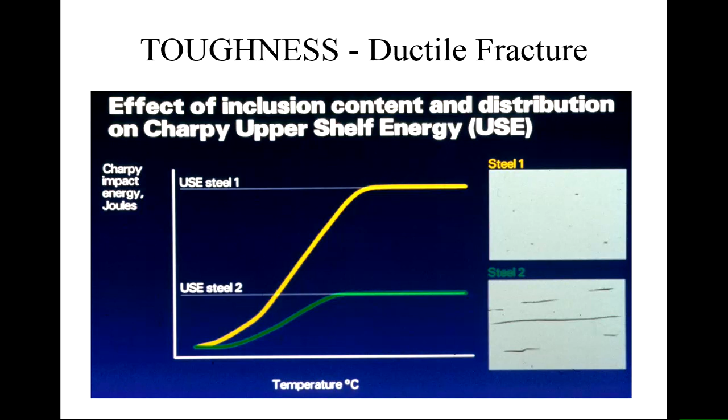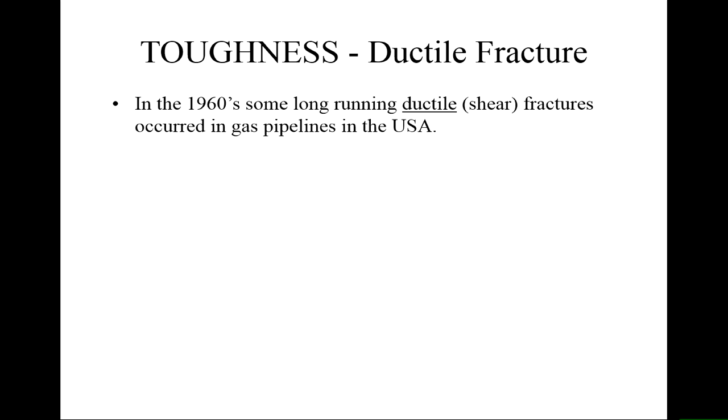So why is this important? Well, we got some highly ductile failures in the US in the 1960s, and we use the words 'long running' - not because they lasted a long time, but because one defect crack produced a crack that unzipped a pipeline for a kilometre or more. So one defect, and then the pipe responds by propagating that crack, and effectively you destroy a large proportion of the pipe. This was really related to the quality of the metal that was being produced.

So the stored strain energy in the pipe was sufficient because it had a low shear fracture energy, because the shelf in that ductile brittle transition was at a low level. And as I say, it's related to impurities, to sulfur and things that were in the steel.

These steels were called dirty steels. They were pretty clean actually by old standards, but they had a lot more of these inclusions in them than conventional pipeline steels. So if you buy steel from a supplier that meets the specification, you've got to be careful that the specification covers things like these inclusions. That's why we tend to put a fracture toughness number in the specification as well as a strength, because the inclusions are so small in volume fraction that they make little or no difference to the basic static mechanical strength of the system. But for fracture, they make a huge difference.

So, of course, you need a convenient test to make sure that your material will pass this, and the Charpy V-notch test, or the Charpy test, which can easily be correlated with full-scale fracture propagation tests on pipes, has been used as a way to say we need this amount of Charpy energy from this simple test.

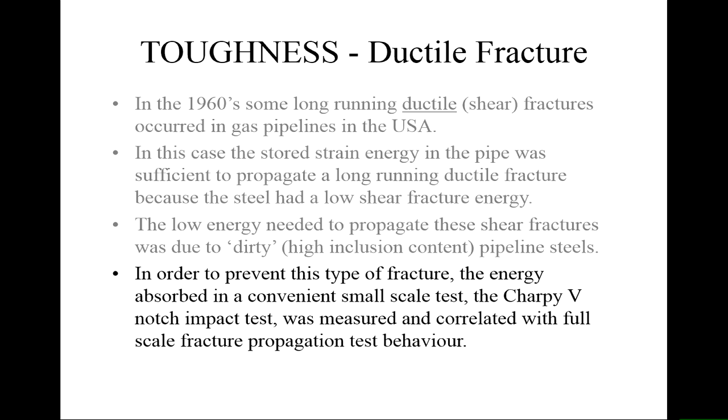A Charpy test takes about 10 seconds to do. The making of the sample takes a bit longer, but it's a very easy test, and because it's easy, it's quite reliable to use for development processes and quality monitoring.

The Charpy test that is used is a standard size test piece. You can also use half size or third size test pieces depending on the wall thickness of the pipe. This has to be cut out of the wall thickness with the notch aligned in the longitudinal direction so that you can get the effect of the hoop stresses.

It's a 10 millimeter square bar, 55 millimeters long, with a 2 millimeter deep V notch cut into it. You can buy from most suppliers special cutters designed to produce the geometry of the notch that you need, so standard workshop equipment can be used to make these samples.

In the Charpy test, there's a support which is 40 millimetres apart, and a swinging pendulum comes and hits the back of the sample to provide the energy. What normally happens is you lift it up to a certain height, there's a certain stored potential energy, you swing it down with no sample in the way, and you see how far it goes up — that's the losses just from the bearings in the machine, and you can set that.

Then when you put the sample in the way and it breaks, some of that potential energy is absorbed in breaking the sample, so it doesn't swing up quite so high. By seeing how far it swings, you can work out how much energy has been absorbed by the sample. It's a very, very simple test.

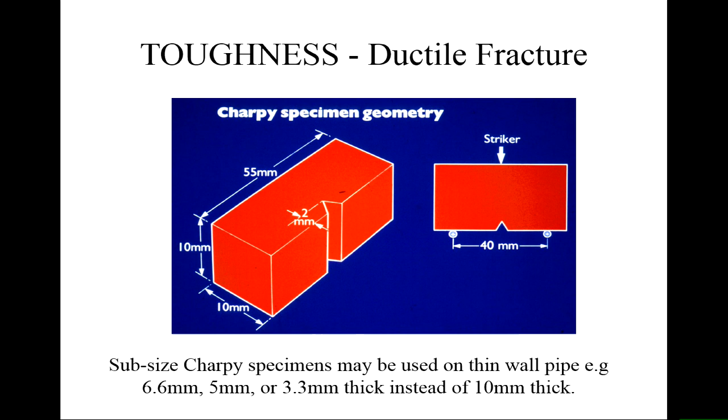So it looks a bit like this. You have a hammer, and that hammer's got a funny shape because you have to make sure it captures the sample and doesn't bounce the sample out of the holder. The sample sits here on the anvil. This comes down and it swings through, and you can see at the end of the swing it's not gone up to the original height, so it's absorbed some energy.

What you're trying to do is that sort of bending test. It's a high-speed bending test with a notch on the tensile side.

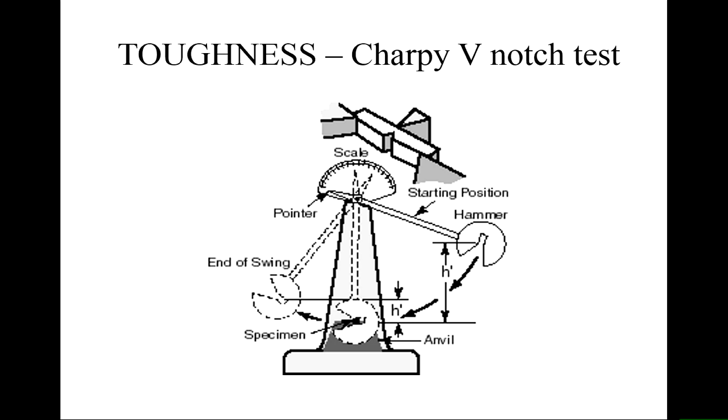Where possible, you take the Charpy specimen in a circumferential direction so that the notch and the fracture propagates in the longitudinal direction for the pipe, because that's what happens in real life. You can't always do that — if the pipe is too thin-walled, then you may not be able to, since the thickness of that sample is less than the full pipe wall thickness.

That means that if there are problems with defects and non-uniform composition across the wall thickness of your pipe, which there often are, the surfaces are different from the bulk, then you'll have to do some experiments to correlate a full-scale pipe test with a Charpy test.

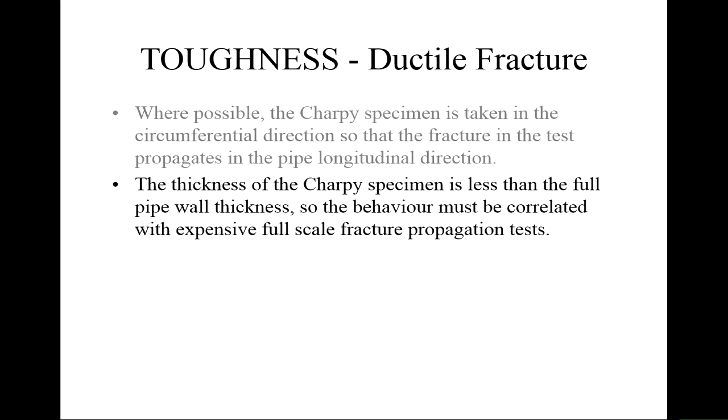Many of the companies have done those correlations, and they'll have a simple equation that relates Charpy to the real life performance. Those performance tests are very expensive, so you want to make sure that you do as little of those as you can to prove that the Charpy test is going to be right for you.

After doing that, recommended Charpy levels have been tabulated in the pipe standards. So we've got a strength criteria, and we've also got a toughness criteria that the material has to meet. Now, of course, these are all things that you can do with any composition of steel you like. So the standard specification does not fix the composition of the steel, it just fixes the properties that you need.

So you have to be careful when you look at specifications that they are performance specifications, and therefore if you pick up steel from one manufacturer and steel from another manufacturer, they aren't necessarily the same. And steel from one manufacturer one year might not be the same as steel from the same manufacturer to the same specification another year. That's not such a problem when dealing with easily quantifiable tests like strength and toughness tests, but if you're going to weld those materials, sometimes the welding procedures will change because the steels are no longer identical, and you have to do some qualification tests.

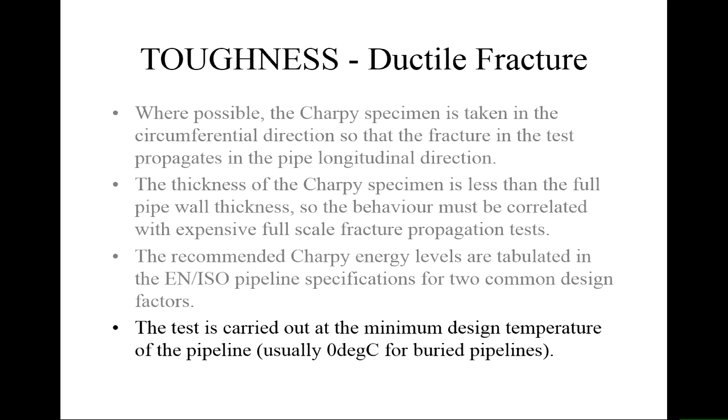So we have again a lower shelf energy and an upper shelf energy associated with the transition from brittle behaviour at low temperature to ductile behaviour at high temperature. So rather, in a Charpy test, rather than looking at the surface and just saying there's 20% brittle and 80% ductile, you now have an energy from that system, and that energy can be plotted directly on a curve, so there's a number that you can compare. It's a little bit less subjective, therefore, than the drop weight tear test.

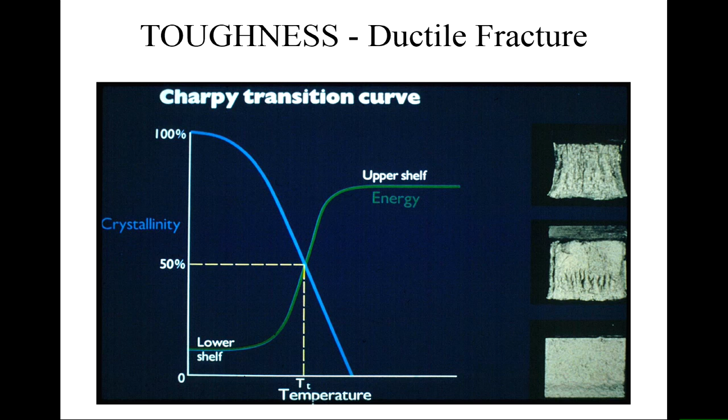Transition temperature, 50% crystallinity, halfway between the lower shelf and the upper shelf, so half ductile, half brittle. So when we talk about a ductile brittle transition temperature, we're going from something which is predominantly ductile to predominantly brittle. It doesn't mean to say there will be no ductile behaviour below that temperature, just that it's 50-50.

So you go and look at the standards. This is the EN standard, and you've got a minimum impact energy in joules for outside diameters of the pipe less than 1.43 meters, and wall thickness less than 25 millimeters. So you start to see that you get different tables with slightly different conditions. You'll see the values for full-size test pieces.

And you've got two things here. You've got the average value to start off with, and in brackets you've got the minimum value. And what you can see is as we go to the higher strength steels, as we go down the steel grades here, so that 555 is the X80 equivalent across here, you can see that the average value minus the minimum value is probably about 10-15 units or something like that. It's smaller at the other end. However, it's a bigger proportion of the total energy at the ductile end. So you've got this awkward position that you've got.

So what you see here is a range of values that you can use in design, and then of course you've got to take into consideration that these things are going to be welded. Requirement 2 here says weld seam requirements, similar to the requirements you get for a low strength steel. You hope that the weld is more ductile than the higher strength steels in these particular cases.

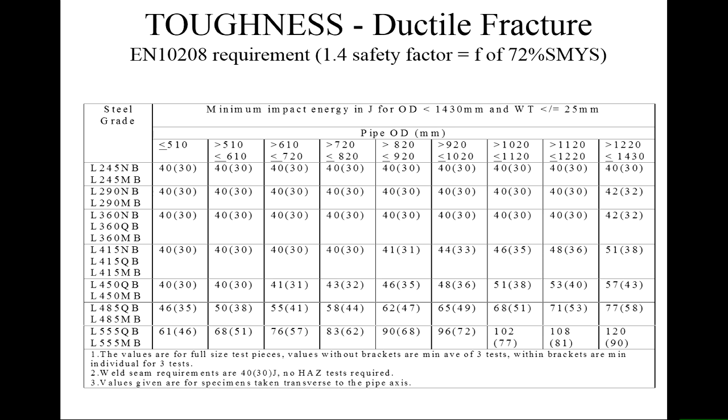Of course, you have to do full-scale testing, and you can't avoid full-scale testing to qualify new materials and to make sure that the toughness is correct.

So this is a test where sections of pipe are being welded together in a trench in a place called Spadeadam, not too far from here. It's out along Hadrian's Wall towards Carlisle, and you'll pass the signs to it on the way. Spadeadam is a military base, and often these tests happen in military bases because you blow things up.

So you have a section of pipe here, and end caps can be welded on, a trench can be made. You can match the sort of conditions that you've got for the real case. You can put a defect in, apply the stress, and watch the explosion when this happens. Then you can go and look at the pipe and see if it did what you thought. You can measure crack propagation, and measure the damage caused.

by deliberate explosions in a controlled case in a field in the middle of nowhere where you're not going to hurt anybody.

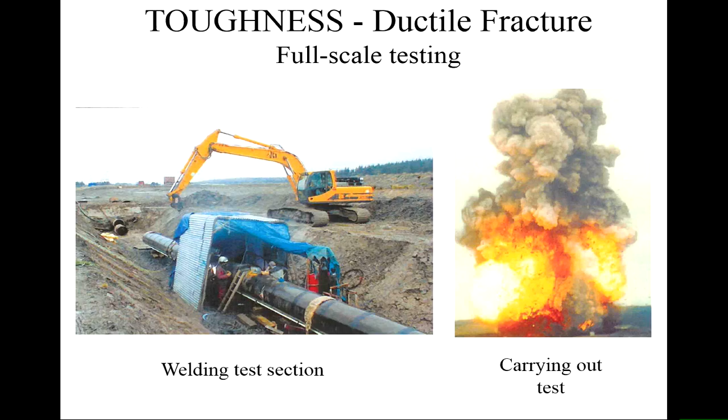So, for seam welded pipe, weld metal toughness is controlled by means of a Charpy test.

Now, of course, the weld, as if you didn't already know, we'll talk about later, consists of the weld metal that's deposited, and that's the thing that tends to be tested with Charpy. But either side of the weld, the steel has gone through a heat cycle which changes its microstructure, and these are called heat-affected zones.

The heat-affected zone, or HAZ, isn't usually measured because it changes depending on where you are in the pipe and the conditions you've got. It's usually assumed that if the welding procedure is good, the heat-affected zone isn't going to be a disaster if its properties change.

But just to make sure that's not going to be a problem, when you've got a segment of pipe being welded in the field, it might have a longitudinal weld along the pipe. You make sure that weld is staggered - it doesn't match up to the weld on the next piece of pipe.

So if a crack starts in the weld or starts in the heat-affected zone, it will run along through that one section of pipe until it gets to the next pipe, which is at a different orientation, and then it will try to crack the pipe base metal itself.

So then, you hope, you expect that you have got a failure which will only occur in one or two pipe segments and will not run on and on and on. So don't line all your welds up.

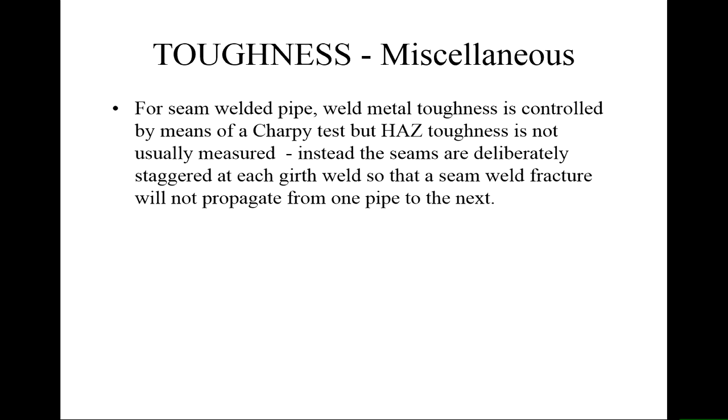Pipeline fittings, so bends, T-pieces, that sort of thing, generally have a greater wall thickness than line pipe. And they're fewer in number, and they're generally something that you can look at in a little bit more detail in the factory beforehand, so you can look for defects, do non-destructive testing and things like that.

So a simple Charpy test is sometimes specified on the material just to make sure that the crack initiation doesn't take place within that volume. You specify just a Charpy test for initiation, you don't worry too much about crack propagation. In fact, some people assume that a fitting with a heavier wall thickness will stop the crack propagation because the stresses will drop in that anyway. So they're almost put in as crack arresters every now and again.

The Charpy test, though, is there because of material quality, and we want to make sure the sulfur contents are reasonable and things like that.

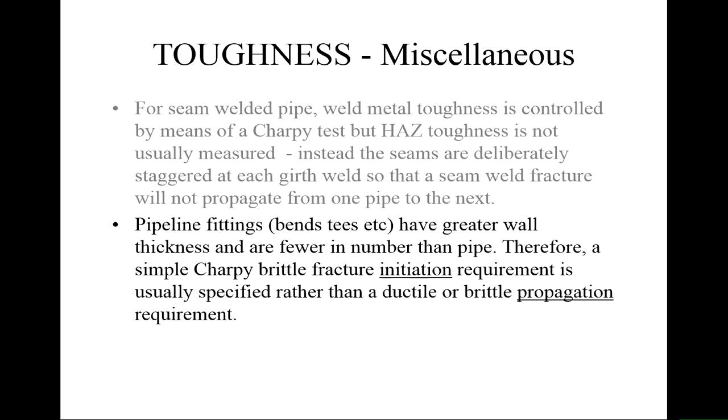A long-running fracture in a subsea pipeline is very unlikely to happen because the hydrostatic pressure from around is actually acting to close up the cracks. Therefore we don't tend to worry so much about toughness for the subsea pipe materials, which seems a bit strange, but actually that's one case where the external conditions are working in our favour.

So again, you want to check on the basic material properties, use a Charpy test, but we don't tend to specify drop weight tear tests and things like that because that's not an issue that has come up.

Is that depth specific, or is it? I have not seen anybody talking about this when the depth is more than about 100 metres, but yes, I think there is. If you're in the splash zone and at shallow depths, then there are all sorts of other questions, and I'm sure the specifications are much more complicated in that case. But for the basic pipe material on the seabed, generally not an issue.

Again, we do the Charpy test for material quality, and that should cover everything. That's the idea, I think.

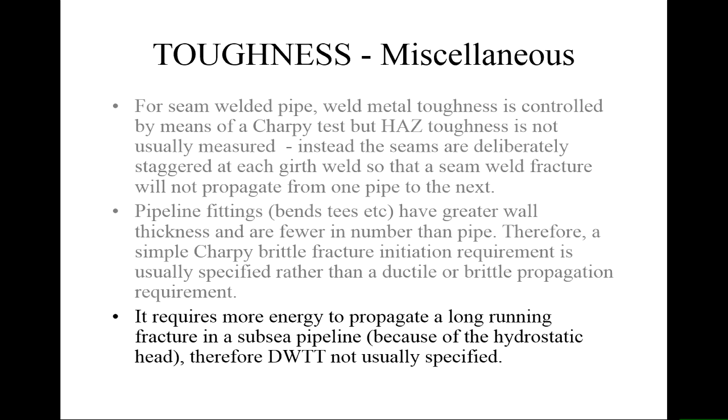Okay, so how can we reduce the possibilities of fracture? Well, if the pipeline is operating at less than 30% of specified minimum yield stress, then the chances of getting a brittle fracture are virtually zero. So one way to actually deal with these toughness issues, if you suspect them, is just to downrate the pressure in the pipe. And that is often the case for assets that have been around for some time.

There's a level where you do the NDT and things like that, and then you keep these things running at a low pressure just to get as much out of them as you can and use them as backup systems, secondary pipelines and things like that, because there's no real risk of brittle fracture. Now that's for older pipe assets.

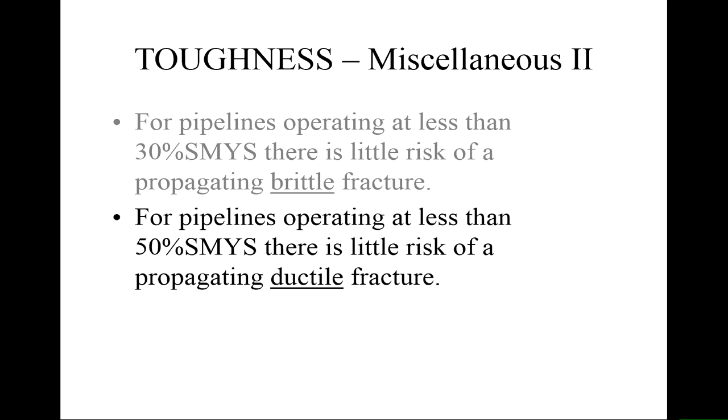Obviously, if you've replaced it with a newer pipe asset, there's less risk of brittle fracture anyway, and it's probably not something you're going to worry about too much. At 50% SMYS, the ductile fractures probably won't operate. So down-rating is a way to deal with some of these fracture issues if you're worried about them. And that's when non-destructive evaluation comes in, which we'll talk about later in the course.

So as I say, if there's a fracture problem with an old pipe, if there's a potential for a crack or a section that's been cracked and repaired, and you're worried about the whole asset, then you might just downrate the whole thing.

And that effectively reduces the design factor in the calculations, which means the asset can run on for a long time. There are some ancient pipes running that have been in service for 40, 50, 60 years, operating at something like 10 to 15% of their original design capacity. But they're still there because, for instance, they provide supplies to hard-to-get-at parts where the replacement cost is very expensive, and they can be used because the demand for gas for that particular location is relatively low.

So you need to be careful, because you can find that there are some very old and not very good materials in service, and you can't switch up the pressure just to deal with excess supply. So sometimes in this country we'll get new towns, new factories, new gas-fired power stations built, and then people have to look at the assets they've got for supply to those areas and make sure that the pressures are possible for all of the assets.

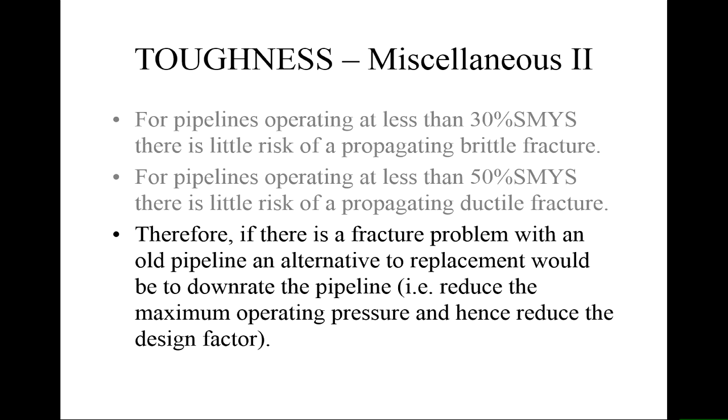Okay, let's move on to welding. Pipe is a simple geometry. It's a tube, circular cross section. We don't have any funny square pipes in this country. Stick the two pipes end to end and weld them. It's easy, isn't it? Probably the easiest type of welding, apart from putting two things together that are much smaller than a pipe. Well, in principle, yes, but in practice, no.

So weldability, the ability of someone to make a decent weld, a good quality weld that does what it says, is much more difficult. I'm no welder. I know how to switch on a welding torch. I know how to make a joint. I can do a pipe weld. Anything I do would not pass in the field whatsoever because I am not that good.

I might be able to teach you about welding in a laboratory class, but not about how to be a welder. Part of the reason for that is I learned to weld on a desk or bench in a workshop with ideal conditions around. It was warm, it was well ventilated, we had the right extract and everything there, and I had a small thing in front of me to weld and the torch to hand, nice umbilical to the MIG welding system. Very easy to do.

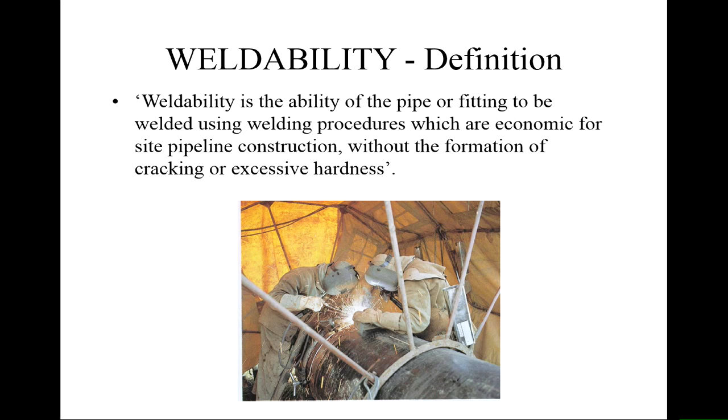So we can do something about that, and one of the things we can do is see what happens when you do the welds on site. Here's an example of manual metal arc welding with cellulose coated electrodes. You can see the weld pass there, a capping pass there, a root bead here, so this is a multiple pass weld.

In fact there are several passes in the fill here, and we've got some penetration issues. We've got a penetration bead - look at this part of the steel and this part of the steel, they don't match up, so there's an alignment issue, and we've got a change in cross section which leads to stress concentration. We've welded with cellulosic electrodes which have not been dried, and hydrogen is produced, making the steel brittle - hydrogen embrittlement. So this crack comes straight through from the hydrogen dissolving in the weld pool and then embrittling it as it freezes.

So when we're talking about weldability, we have to take these sorts of things into consideration. These are cracks, in this case, that have come because of the welding process we've done. They were not an intrinsic property of the steel to start off with. The hydrogen has come from the dampness in the air, and that has caused the problems.

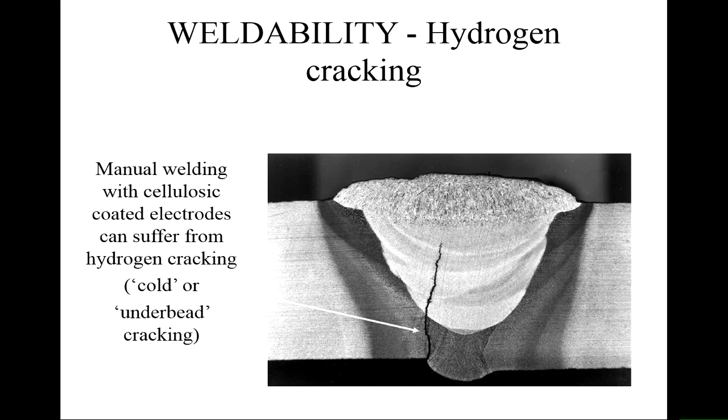So hydrogen cracking is probably the biggest problem with field welding. It tends to occur in the heat-affected zones - as you can see here, the light blue areas are the heat-affected zones. The crack might start at the weld metal, but it tends to start at the toe of the weld. So this is the fillet weld at the toe, right at the edge, and the crack you can see running in there, running underneath.

And there's another one here where there's a change in cross-section, so there's stress concentration. The toe of the weld has more defects in it than the bulk of the weld, and that's why it tends to be a starting point. In a butt weld, again near the penetration bead, this is a case where we've got lack of penetration on one side, so again you can get the crack coming in there.

For hydrogen cracking to occur, we need a source of hydrogen, and that's often water. We need a susceptible microstructure - some of the martensite structures I talked about earlier are more susceptible than the basic ferritic steel structure. And we need tensile stress, either residual stress or applied stress.

Now if you consider this butt weld, if you clamped either end of the steel and welded it so it's all flat, what's happening to the weld metal? It's deposited at a very high temperature, then cools down to room temperature. The steel contracts because its thermal expansion is being driven in the opposite direction. If you clamp the material at either side and allow it to contract, you're putting the weld metal and the heat affected zone into a state of tensile stress just from the mechanics of welding. So that's the residual stress component, if you like.

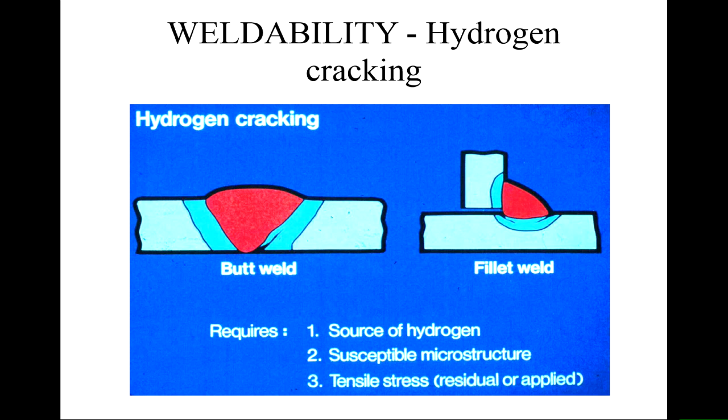And the applied stress is - you've got to pick these pipes up and move them around, so there will be bending stresses and other stresses applied. So the reason this is sometimes called cold cracking in hydrogen is that it happens at the end of the welding process. It happens when things are cold, when they're being moved around after the welding process is complete.

Hardness is important in these cases. The harder the material, the more brittle it is. So if we put a hardness test in, this is a diamond pyramid pushed into the surface under a fixed load. The bigger the impression, the softer it is; the smaller it is, the harder it is.

So there's the parent metal, heat affected zone, more heat affected zone, and then the weld metal. Nice big impression, so soft weld metal, reasonably big impressions here and in this part of the heat affected zone. But in this part of the heat affected zone, right next to the weld bead, that impression is smaller, so that has a higher hardness. This is where phases like martensite form, and this is where brittleness is most likely to occur. So you will most likely see cracks, if you do get them in welding, in the heat affected zone next to the weld pool - that's where they'll start.

So it's not the weld metal that necessarily is the problem. It's the change in microstructure that you put the steel through when you actually make the weld. And that depends on chemistry, it depends on the size and shape, it depends on fittings, it depends on everything. So that's why we do quite a lot of measurements of welds, and then we cut them open.

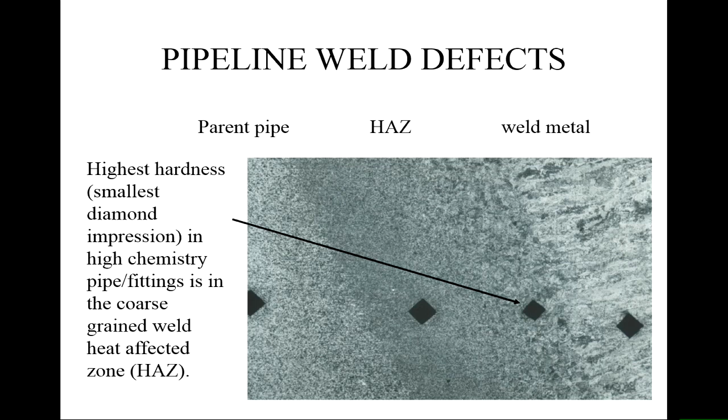And we have a look at the microstructure changes and we see how the mechanical properties change. We can do this local mechanical test with a hardness impression that will give us an indication of what's going on. You can even polish the surface of a weld and use a portable hardness tester to actually monitor the heat affected zone hardness if you really need to.

So what do we want to be able to do to get a good material for welding? Over the years, we have achieved more and more weldable constructional steels by reducing the amount of carbon, and in particular the amount of carbon and manganese, in the steels. So you can look at that in terms of carbon equivalent, which is carbon plus manganese divided by 6. We'll talk later on about different carbon equivalent equations. But basically, to stop forming brittle phases like martensite, we want to reduce the carbon content and the alloying element content of the steels to make them more weldable.

So this is a point I was making earlier on. Just because you see X60 as a specification doesn't mean to say the composition of the steel will be the same. What meets an X60 specification today is completely different to what it was like even 20 years ago.

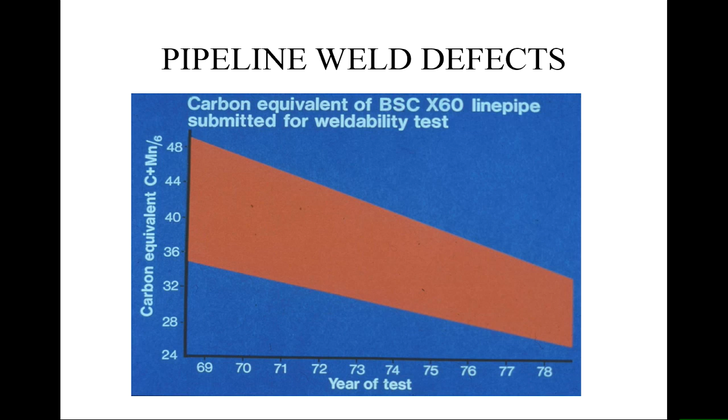So what affects weldability then? There's a load of factors. Increasing the carbon equivalent, increasing the carbon and alloy content of the steel. Every alloying element, nickel, chromium, manganese, molybdenum, all that sort of thing, everything, with the exception of cobalt, will decrease the weldability. And it'll increase the cost of the steel. So you don't really want to put them in anyway, but anything that you add is going to make things more difficult.

Martensite forms by heating up to an austenite temperature range, about 700-800 degrees C, 900, and then cooling very rapidly. So if you increase the wall thickness of the pipe, there's more metal to conduct the heat away. So increasing the wall thickness, the weldability goes down. Similarly, if you increase the diameter of the pipe, there's more metal in the pipe, the weldability goes down.

If you increase the grade, so it starts off with a higher strength, there's more cold work been done to actually make the pipe grades with these higher grades. They're more difficult to maintain the microstructure, so the weldability goes down.

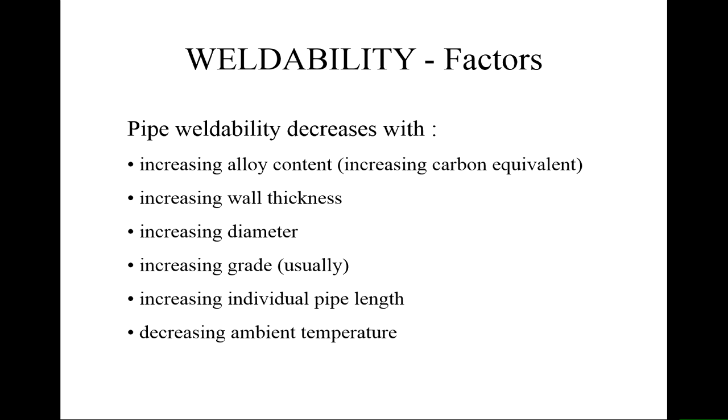If you increase an individual length of pipe from 12 to 18 metres as delivered, there's more metal to conduct the heat away, the weldability goes down. And if you decrease the ambient temperature, so you're welding in a Scottish field in the middle of winter, the weldability goes down. So anything you do to increase productivity and make the process look nice and simpler and easier tends to make it more difficult to weld. And so you have to think about these things.

So carbon equivalent is the way that people have an assessment of this. Carbon equivalent formulae take the most common alloying elements in the steel and factor them according to their effect on weldability. They were originally developed by the steel industry to look at the ability of the steels to make martensite. So hardenability became weldability when the welding engineers got hold of it. It's the same idea. It's what makes the steel hard and brittle.

So the steel industry did it for developing tools, and the welding industry's done it for developing constructional steels. It's a different use of the same ideas.

So the International Institute of Welding equation is the most common formula. The carbon equivalent is the percent of carbon plus the percent of manganese over 6, plus the percent of chromium, molybdenum and vanadium over 5, plus the percent of nickel and copper over 15. Those are the main steel alloying elements, and you can see that everything you do has an effect.

So a typical constructional steel might have a small amount of nickel, molybdenum, manganese in it. The basic carbon content is 0.2%, but the carbon equivalent is about 0.5%. And it's much harder to weld than you think because of all these other elements.

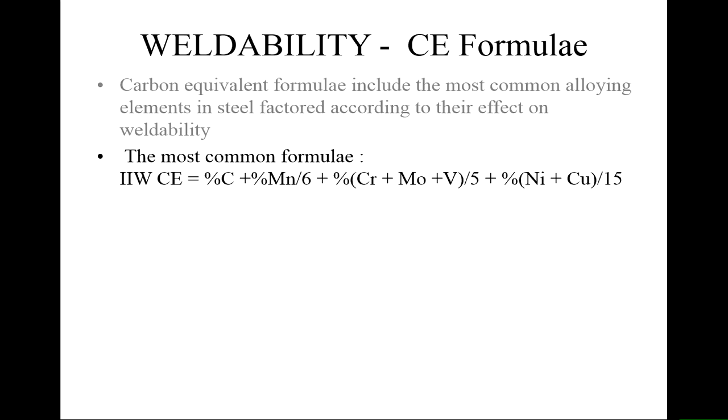And the killer one really is manganese, because that's added in the primary steelworks. So when we talk about carbon steel, what we should really say is carbon manganese steel, because every steel has manganese in it. It's a deoxidant and it deals with the sulfur in the steel, but it affects the weldability. So you need to know the manganese content.

There are other variations. The PCM equation here takes into consideration some other elements: silicon, which is added as another deoxidant, and boron. And it's got vanadium, which is added for carbide formations for some of the higher grade steels. So it's a more useful formulation for some of the newer steels.

And it's mainly applicable to the lowest carbon steels of most recent generations. So the IIW formula tends to be used more widely because most constructional steels are not less than 0.12% carbon. But if you're making a car body or something, that's the sort of steel you're going to use. And what you can do is set a limit on the maximum carbon equivalent or the maximum PCM value for a particular project.

So for different steels, you can plug the numbers in from the composition into these formulae, get an overall carbon equivalent and compare that to a limit that's been set. These are metallurgical numbers, so they're not atomic percent, they're weight percent. All metallurgists work in percent by weight.

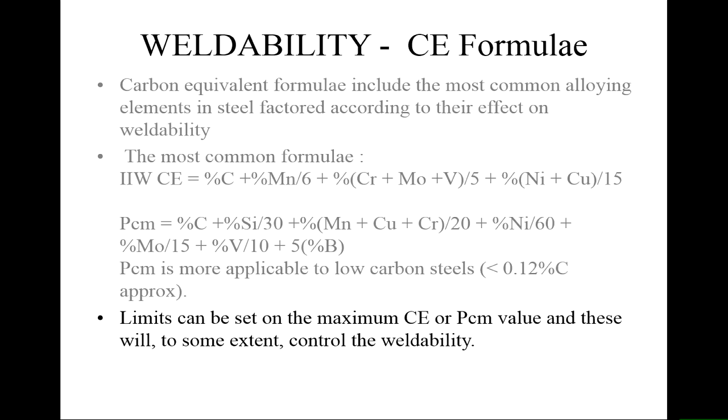Does that tell you everything you need to know about weldability? No, it's a rough guide. But if you're changing from one material to another, it's the first thing to do, just to check that it meets the specification. Usually you have to do some sort of testing.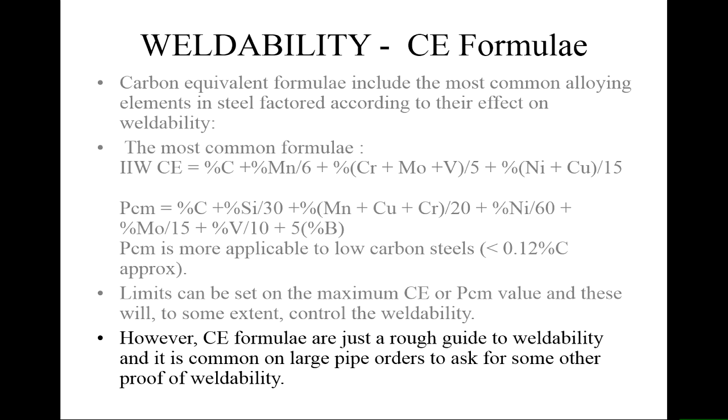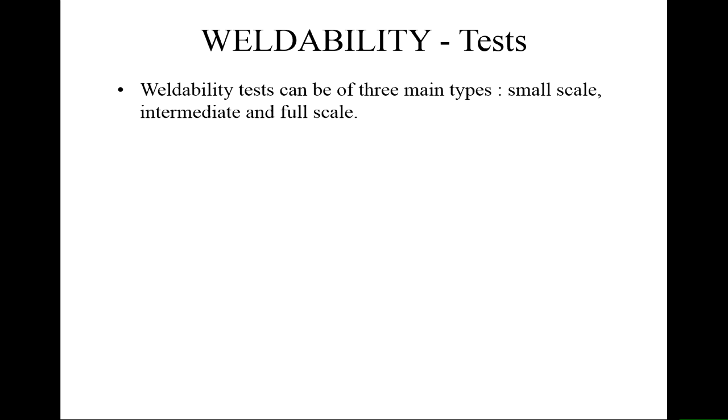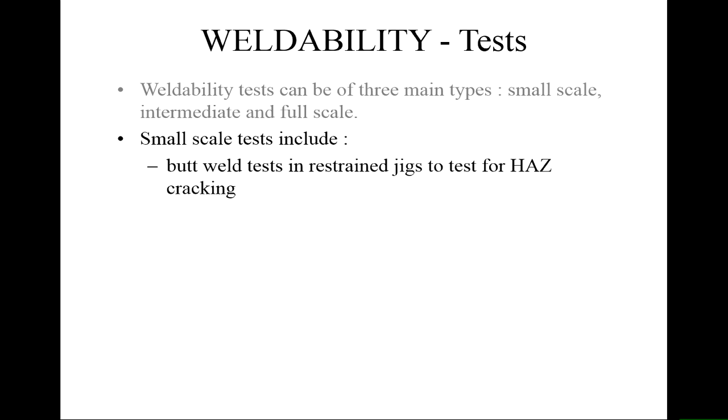So what do we got for weldability tests? Small scale tests, intermediate scale tests, full scale tests. So small scale test, you just put two pieces together in a restrained jig, weld them, and see if we get cracks. Very simple tests.

You can get some standard laboratory tests like implant tests, some Y-groove tests. I'll show you a picture of these in a second. But they're all done in the lab. And the idea is to get a procedure which you think you're going to work with.

So these are standard tests. You can look up the procedures. They're in the standards and things like that. They can only tell you that the welding procedure made a good weld or a bad weld in the lab. They don't tell you what's happening outside.

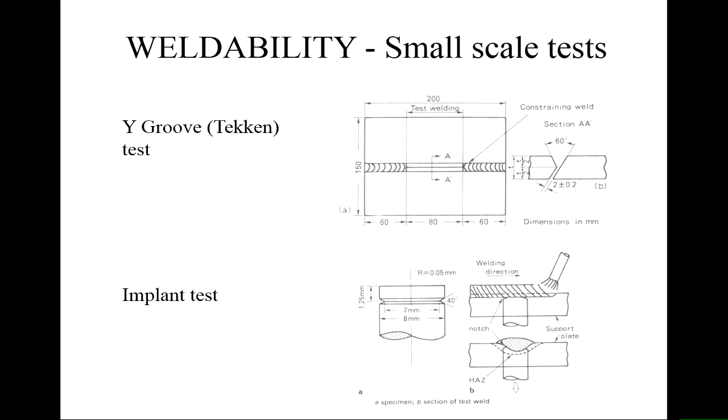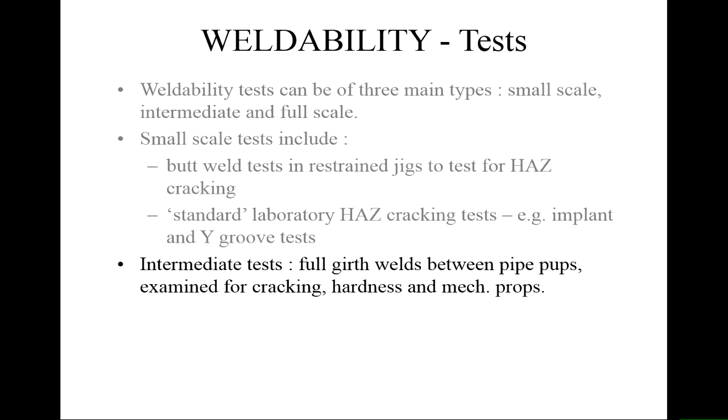Intermediate tests you have to do, that's full girth welds between pipe pups. A pipe pup is a short section of pipe. And this is often what you do for welder training. And then you can cut that pipe section up and you can do hardness tests, cracking tests, mechanical tests, and get some indication of how it varies from welder to welder or from position to position. And you need to do those tests.

And then you finish off with full scale tests, full girth welds between full pipe lengths, simulated site conditions, everything that you wanted.

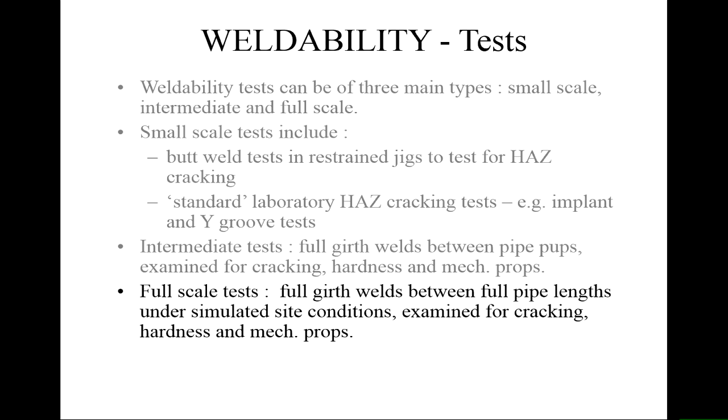So here's a full scale test in operation. This is to test the craning of a pipe that's been partially welded into a trench. You've got a weld here and the root bead has been completed, but none of the capping passes or fill passes have been done. Then that weld is being picked up by this crane. The whole thing will be bent and stressed, and it will be moved and put down as if it was being craned into a trench.

And that's done for cracking testing by non-destructive testing before and after, just to check that no cracks form. So if somebody makes a mistake and starts to put things into trenches before they're finished, you can check that that's going to work. So these full-scale tests really match site conditions as much as you can.

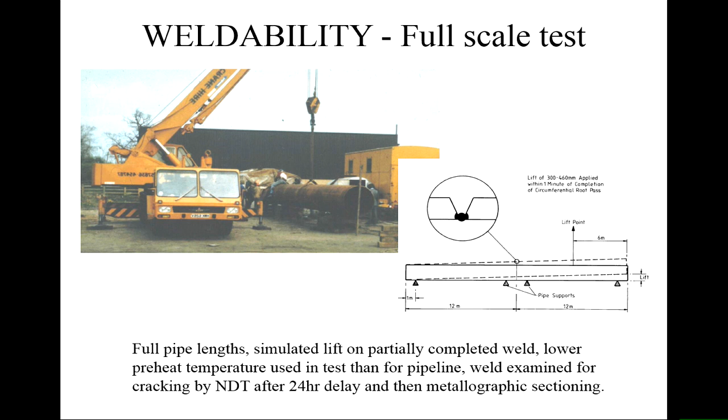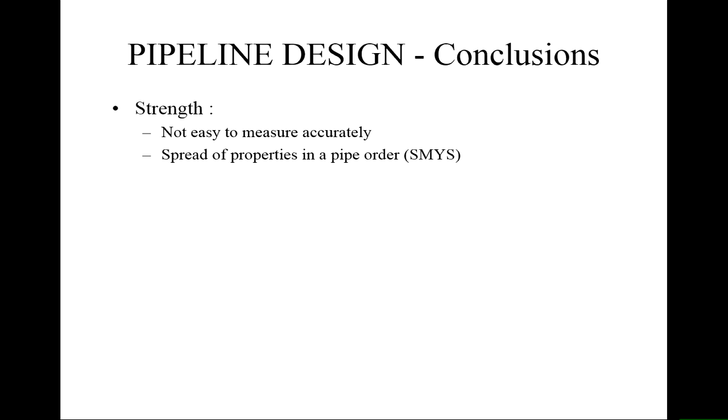Nearly finished. So just for conclusions on design, strength is not easy to measure accurately. There's a spread of properties, so we go for the specified minimum yield stress.

Toughness, we can measure for brittle and ductile fracture propagation. We can use drop weight tests for brittle and Charpy tests for ductile fracture, and we use a Charpy test for measuring fittings.

And weldability, carbon equivalent formulae are often used to assess different materials, but they're only a guideline. They don't tell you about the welding procedures used and how that affects things. So you have to do tests.

Small-scale tests in the lab can prove a procedure for trial, and then it has to be tried on intermediate scale tests on pipe pups and things like that to make sure that it's a practical test that the welders can do reliably and give you good results.

And finally, you have to do full-scale tests, because without that you can't guarantee that the welding procedures are going to be suitable, and you therefore need to qualify every step of the welding procedure, not just the depositing of metal, but the handling of the pipes and things once that has been done.

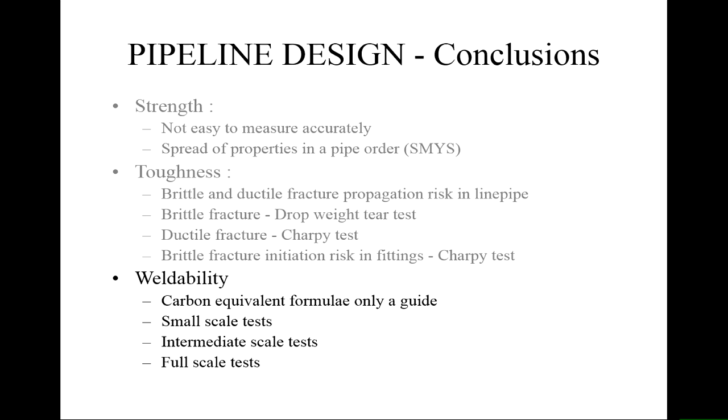And that is the end of the introduction, which I've raced through to get it done just in time.

So you've now got a couple of weeks where there is no materials and fabrication, because the pipeline engineers have their introductory modules elsewhere. When you come back, what we're going to do is take some of these things we've heard about here and go in even more detail. We'll talk about making steel, we'll talk about turning steel into plate, turning plate into pipe, joining pipe together to make the pipeline.

And how you look at the defects, how you guarantee that that pipe is going to work, and what you have to do to introduce new materials into the industry. And that will happen after you've had your couple of weeks of pipeline introductory lectures.

Okay. Are we going to run these tests? You'll look at the results of some of the tests. If you do a project, you might do some of the tests themselves, but it takes a long time to make the samples, and generally we find that it's better just to see what comes from there.

As a lab class, you'll actually get a chance to look at some of the metallography and look at the samples that have been cut from welds and try to understand the weld microstructures and things like that. And we'll do some simple stress calculations for those that are not used to it. But actually doing the mechanical test, we can show you one, but that we'll leave to previously done tests.

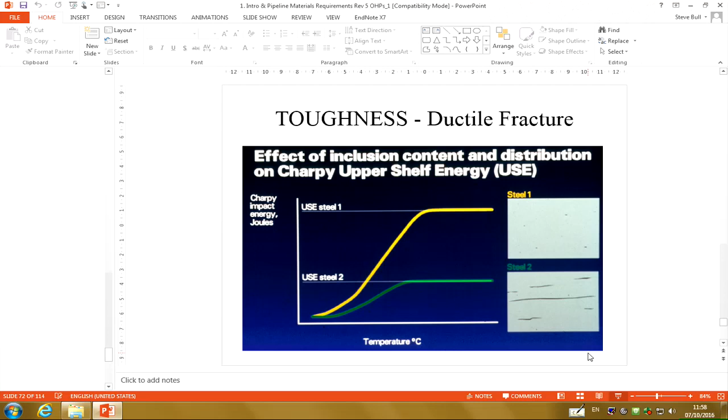Yeah, pipe, you just cut the end off the pipe. It might be about this wide, this sort of size. And then you can cut a pipe into lots and lots of sections. So a welding team can take one 12-metre pipe and have 20 pipe pups, which they can then try.